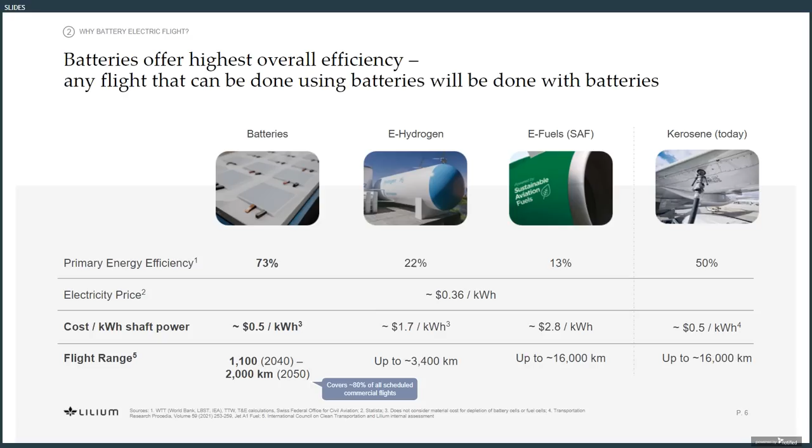Therefore, we believe that any flight that can be done with a battery-powered aircraft will be done with a battery-powered aircraft. Electric aircraft are limited in range today, but batteries are getting better every year. Hence, we believe, from a technology point of view, that by 2050, around 50% of all flown passenger kilometers could be done in a battery electric aircraft.

Over the next 1 or 2 decades, we expect 75% of electric aircraft performance improvements to come from the battery. So the battery is the performance driver in an electric aircraft. The two key aspects here are power for takeoff and landing and energy for the range. Beyond that, every cell design is a compromise across many competing aspects such as safety, cost, cycle life, recyclability, and many other factors.

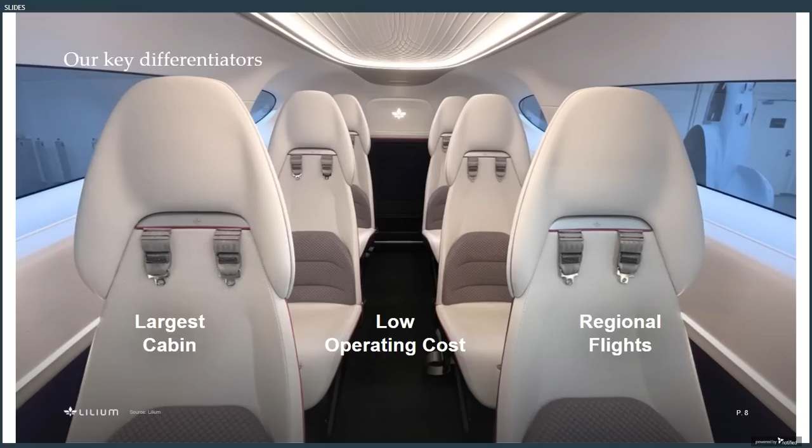As a short recap, the key differentiators of our Lilium Jet are the largest cabin in the sector with clear premium positioning and aesthetics. With $2 per passenger kilometer, we have low operating cost that even includes margin for an operator, and we focus on regional missions.

And beyond that, on the technical side, of course, we are highly differentiated, developing the first eVTOL aircraft using electric jet engines. 95% of all aircraft on the globe use jet engines. And I'm quite sure if you have flown turboprops, you know from your own experience why passengers prefer jet aircraft. They fly faster, they have lower noise emissions and vibrations in the cabin, they are and feel safer, they clearly have better aesthetics, and on top they are simpler as they don't require variable pitch on the blades.

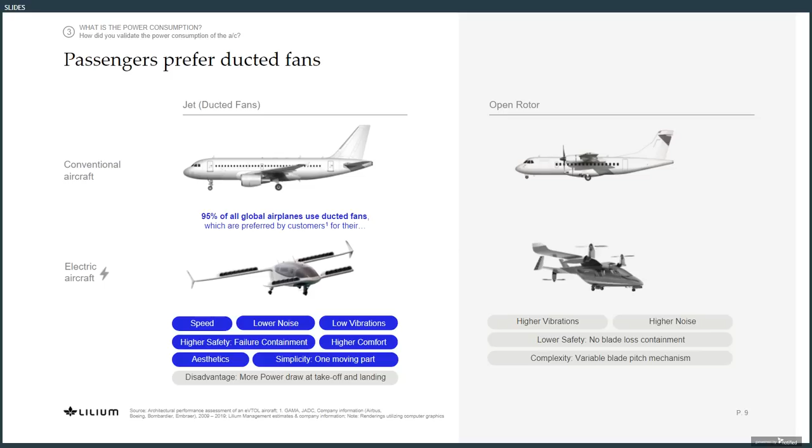However, jet engines are also well known to require more power at takeoff and landing. So let's look into quantifying this disadvantage and evaluate whether the benefits still outweigh the disadvantage.

To get going, we need to understand the concept of disk loading. Disk loading is the weight of the aircraft divided by the total cross-section of all propellers or engines. And what you see on the left is a graph drawn up by NASA around 20 years ago, showing the hover efficiency of various aircraft types depending on their disk loading. This is applied physics, so this graph does not change just like gravity or the Earth's surface or pi does not change. In general, the rule applies that the lower the disk loading, the lower the aircraft power consumption in hoverflight. But also, the higher the disk loading, the faster the aircraft flies.

You can see that a helicopter has the lowest disk loading among traditional aircraft with around 25 kilograms per square meter. On the other side, on the right, a direct lift aircraft such as the F-35 is operating at roughly 1,000 times higher disk loading since it is a high-speed aircraft.

Now we will use this chart to get an idea of the power consumption in hoverflight in a very simple way. Our aircraft is using jet engines and it has a disk loading of around 1,150 kilograms per square meter. We go into the chart and obtain a lift efficiency of around 1.7 kilograms per kilowatt of shaft power. Now we invert this value to obtain shaft-specific power. We divide by the electric powertrain efficiency to obtain specific electric power, and we multiply with our aircraft weight to finally obtain the total electric power draw of 2,147 kilowatts.

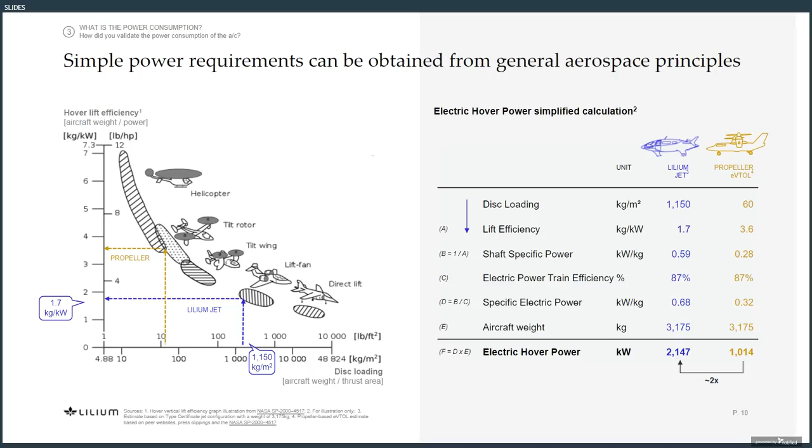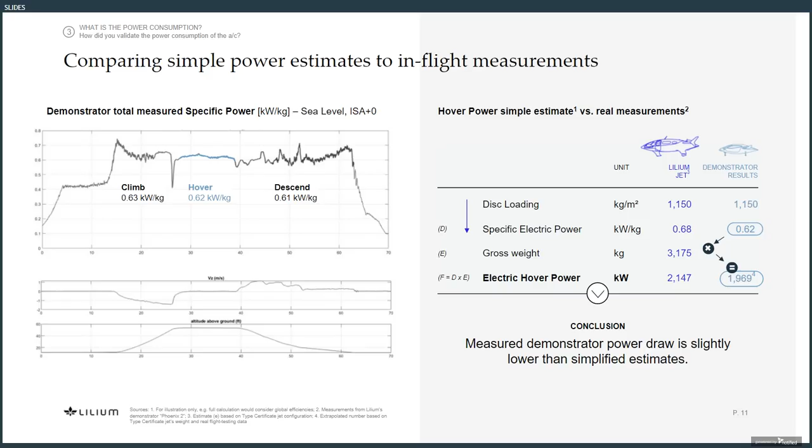But overall, the simple approach of the NASA paper predicts power very well. I will use the high power consumption value from the NASA paper throughout the rest of this presentation to be conservative and also account, for example, for flight at higher altitudes. Also, it is important to note that all our mission profiles and range estimates are based on the fully loaded aircraft, so with the full weight we are flying those missions.

What I have just done is an ultra-simple approach to demonstrate power consumption, which you can easily follow in a presentation. Of course, our engineers are using far more sophisticated tools to calculate the power consumption of our aircraft. We are following the principle of evidence-based engineering at Lilium. This is the same approach which allows the major aircraft OEMs to predict fuel consumption of their aircraft with an error of less than 1% before they actually fly.

What we need for certification of the aircraft is a validated aircraft performance model which accurately predicts flight physics of our aircraft in all flight conditions. This includes, for example, failure cases, the full speed envelope, altitudes, temperatures, and maneuvers.

To get it, it all starts with simulations. Based on those simulations, we design a first loop of our aircraft and systems. Then we did 4 years of flight testing and a total of more than 5 months of wind tunnel testing to obtain real-life data with which we can calibrate and validate our simulation tools.

Additionally, we measure compressor maps, motor efficiency charts, and we do battery characterization. Then we take all this data and integrate it into an aircraft performance model, which is validated by real-life data and which can be used also for certification.

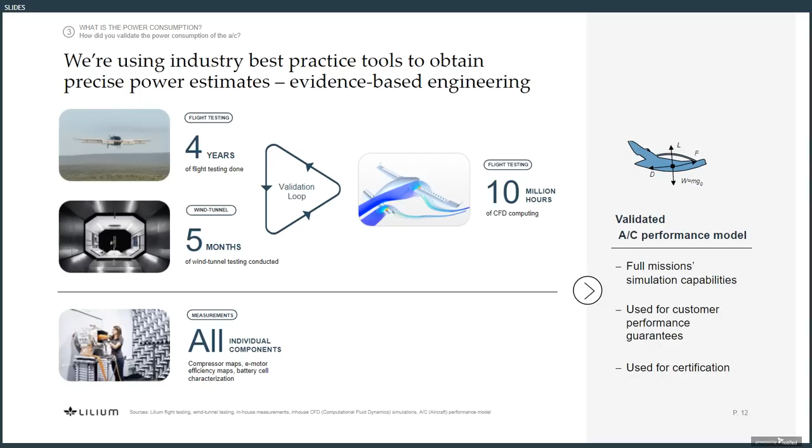All our power profiles and mission profiles, also those in this presentation, are based on this validated aircraft performance model. And you can imagine, as we use this model for both certification purposes but also to make performance guarantees in the binding contracts with our customers, the rigor that goes into it is incredibly high.

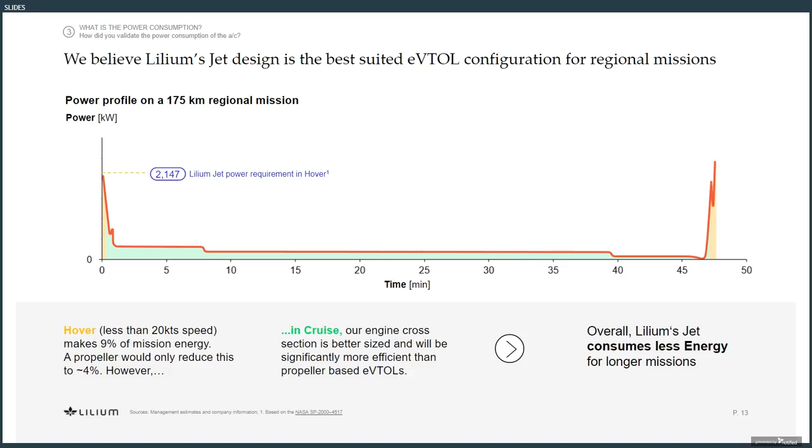Overall, Lilium's jet consumes less energy for long missions. The increased power consumption in hover is more than compensated in cruise flight. On top, we are flying significantly faster in our long-range mission compared to our peers. Hence, our aircraft is ideally suited for regional missions, and the better batteries get, the bigger our advantage becomes.

Now we shift our focus to how the battery cells provide this power and energy. The power consumption in hover flight divided by the total mass of battery cells in the aircraft gives us the specific electric power we draw from the cells in hover flight.

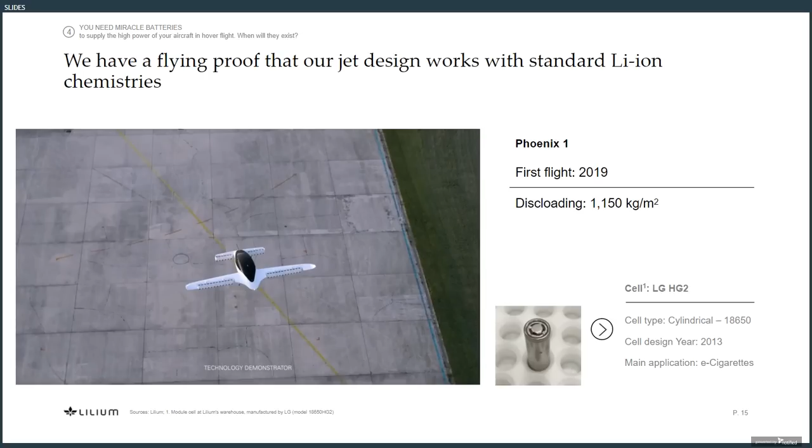In contrast to what I've just shown, we have heard concerns that our aircraft would be dependent on battery technologies half a decade away. This is obviously wrong. In fact, we have done 4 years of flight testing with full-scale demonstrators, and all of our demonstrators have been flying with off-the-shelf batteries using standard lithium-ion chemistries.

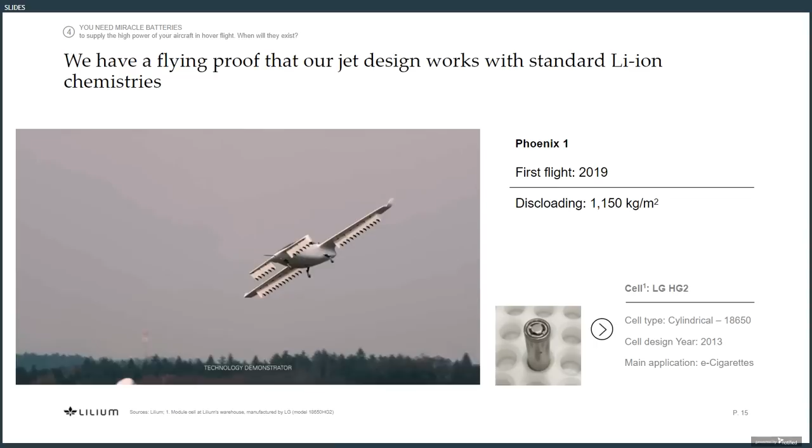In 2019, we flew our Phoenix 1 demonstrator for the first time, and the cells in the pack were the LG HG2 cells, which were designed already in 2013. It's a well-known 18650 cell, which you can actually buy on Amazon.

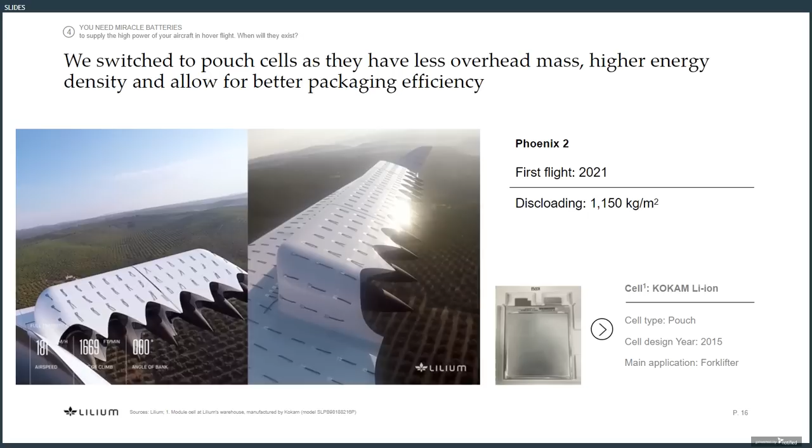In 2021, we then flew the second generation of our demonstrator. Again, we used a standard lithium-ion chemistry with a graphite anode. This time we were using a Kokam cell, which was originally designed around 2015 for forklift applications. The battery pack in this aircraft was also the first flying prototype we had which fulfills the full fire containment requirements from FAA. So we have 4 years of flying proof that standard lithium-ion chemistries can provide the power we need for flying this aircraft configuration.

The reason we're using lithium-ion cells with higher silicon content for our entry into service aircraft is our regional business model. We simply want more range.

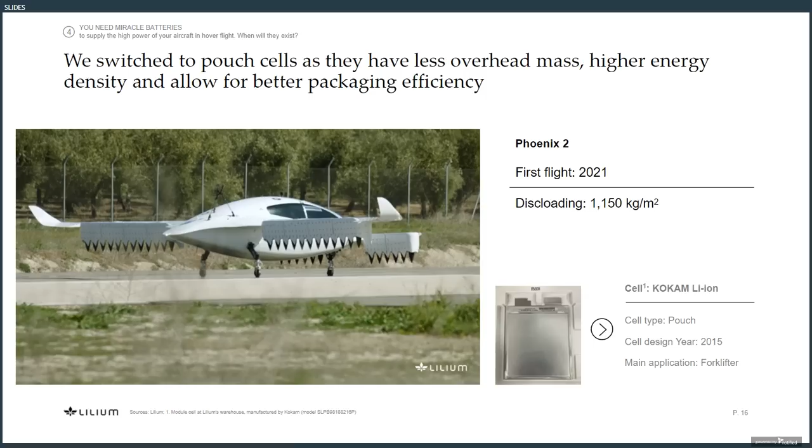This is the cell which will actually go into our conforming aircraft, which we are building right now. It is a lithium-ion cell designed by our technology partner Ionblox in the USA. We are invested in Ionblox alongside our co-investors Temasek and Applied Materials. Ionblox have developed one of the best silicon anodes for lithium-ion batteries, which can be mass manufactured.

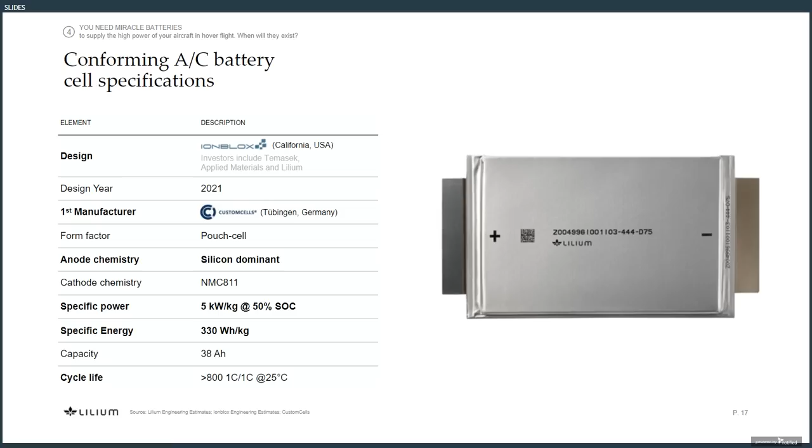The anode is silicon dominant, which means roughly half is silicon and the other half is other components. The silicon in the anode is the reason why this cell achieves higher energy, higher power, and higher fast charging capabilities than cells with standard graphite anodes. The cathode is a standard NMC 811 cathode, the number 1 cathode chemistry you can find in automotive cells these days. The cell is being produced by Custom Cells here in Germany.

Now let's put this cell into context of what you can find in the market. Energy and power are always a compromise in a cell. You can either find high power cells, such as the Swaytronic, which provide 3 times the power of our cell, or you can find high energy cells, for example the ones from Amprius or CATL, which have announced more than 50% more energy than what we have in our cell right now.

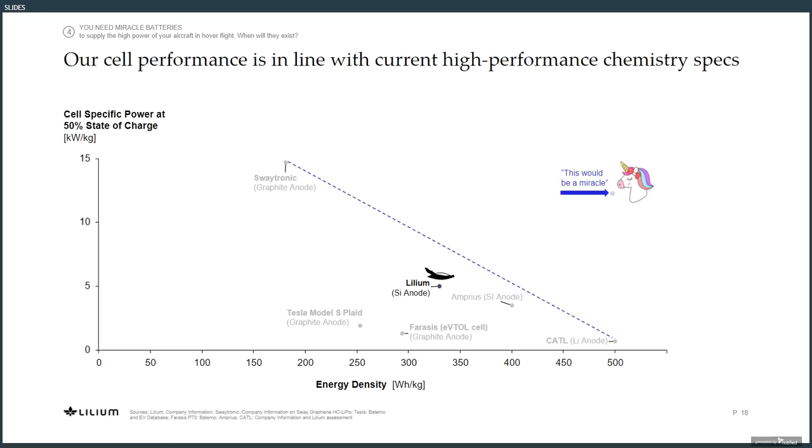We are not alone in using silicon anode cells. In fact, it is widely recognized that silicon anodes are the next step in lithium-ion batteries in automotive. There's a great article from IEEE Spectrum explaining why silicon is the next big thing in lithium-ion batteries. It enhances energy and power, and also allows fast charging without cycle life degradation.

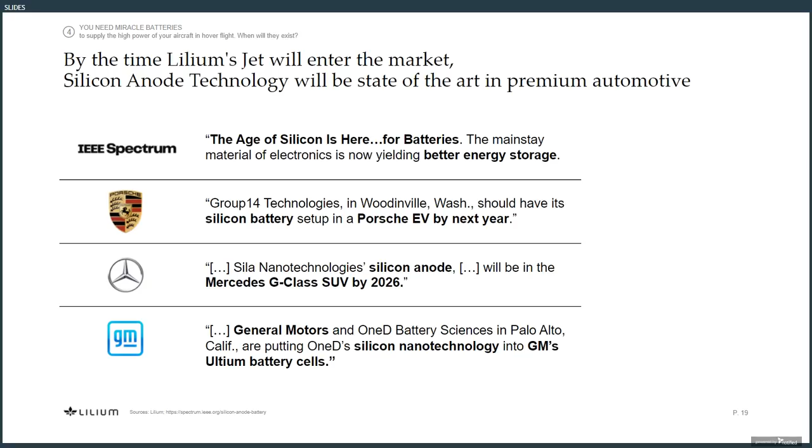For those reasons, GM, Porsche, and Mercedes have all announced premium cars for the 2024 to 2026 timeframe using silicon anodes like we do. Tesla, of course, has also announced bringing silicon into their cells. So by the time our aircraft goes on the market in 2026, our cell chemistry will be state-of-the-art in premium automotive. But this also means that if you come to market in 2026 with an electric airplane using graphite anodes, you are using a dated technology that is no longer competitive.

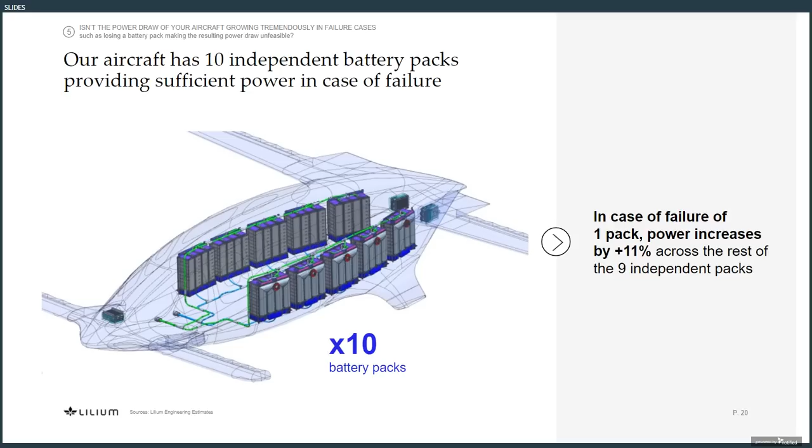Another question we sometimes get is whether the power draw grows tremendously in failure cases. Of course, our engineers have thought extensively about this, and we wouldn't obtain certification if we had no answer. To mitigate this problem, our aircraft has 10 independent battery packs. If one of them fails, the remaining packs need to provide only 11% more power. This is in line with what the cells can produce in an emergency. We always take worst-case failures into account in our design, and we have tested the power increase resulting from all kinds of aircraft failures on our cells.

Another question we've received often is whether our battery pack will become too heavy once certification and safety requirements are incorporated. Well, we have already incorporated all safety requirements into our current battery pack, such as crash protection, fire containment, flight loads, and redundancy. We had to, since this battery pack goes into our conforming aircraft.

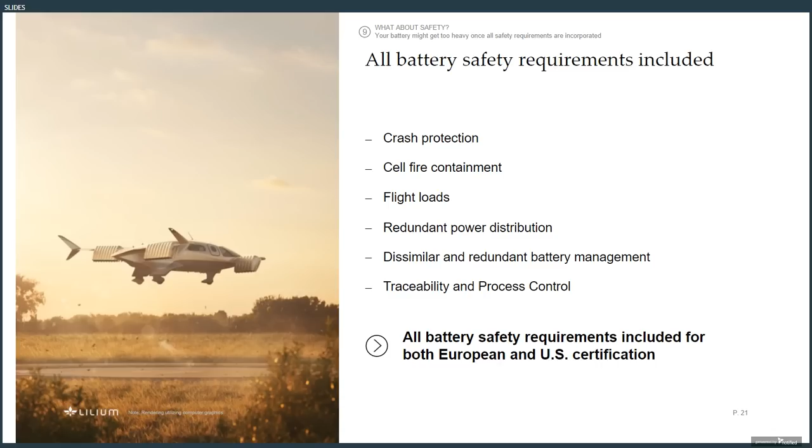The first pack in which we had incorporated full fire containment was the Phoenix 2 battery, which flew in 2021. Since then, we have done several years of flight testing with this technology, and those tests have confirmed that our design is compliant with the regulation.

Another question we hear often is what reserve concept we are using, and what operating range results from it. On the European side, EASA have formally released an operating reserve concept called Part IAM, which is applicable to our aircraft. Part IAM is a performance-based framework. There is no specification whatsoever for hover time. All our operating range estimates and our aircraft design are based on the EASA Part IAM reserve concept.

This reserve concept is stricter than any other operating framework for helicopters, for example, since it mandates landing on a vertiport in all cases, even the most critical failures.

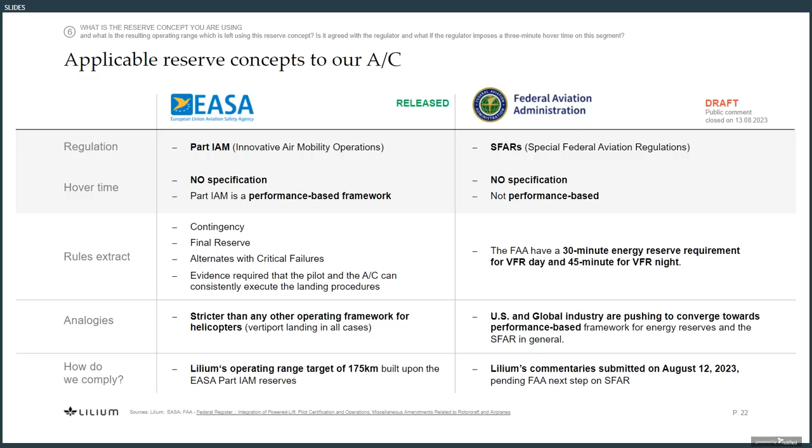On the FAA side, there have been some wild rumors that the FAA may require a 2 to 3 minute hover requirement. This is completely and unequivocally false. The FAA put out an SFAR in June 2023 and opened it up to comments from the public. There is not even a single mention of hover requirements in the whole document. The link to it is on the page here, so you can see for yourself, and the only mention is a 30 to 45 minute energy reserve.

It is clear that eVTOL operations become problematic with a 45 minute reserve. Hence, all of our peers and an overwhelming majority of the aerospace industry have requested performance-based reserve requirements from the FAA, just like EASA is already using. If you go to the link on the page here, you can see and read the comments from all the various companies for yourself.

It is a big advantage for us that our regulator has provided substantially more guidance than the FAA so far. We have a clear and released framework for eVTOL operations in Europe. And here is how the European reserve concept works.

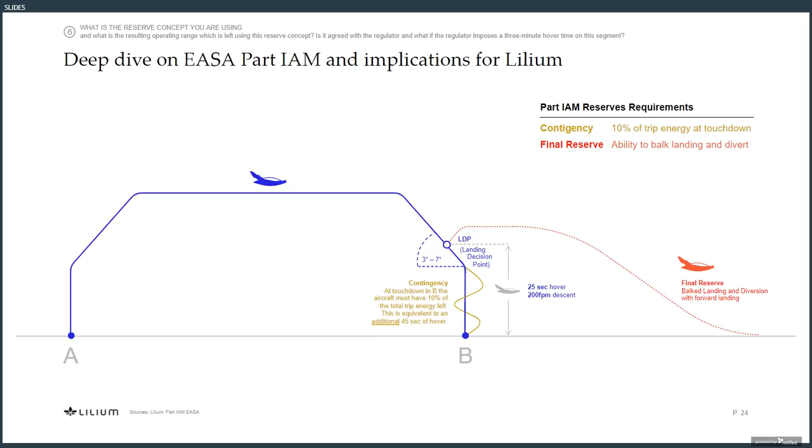To validate the reference landing procedure, we are again using a best practice aerospace approach. We have a mixed reality 3D simulator with a fully representative cockpit and a full motion platform. This simulator contains the validated control laws and flight physics from our certification aircraft models. We can simulate wind, rain, and night conditions in various combinations.

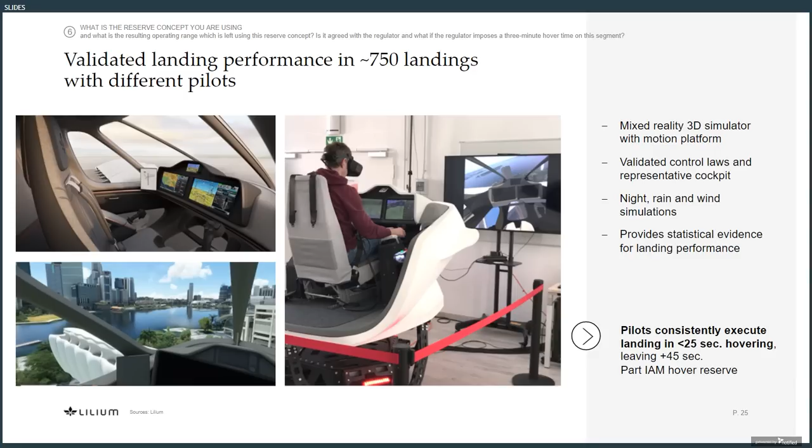In this simulator, we have developed our reference landing procedure and tested it with more than 750 landings with multiple pilots. We have also developed landing aids which make it easier for pilots to consistently land the aircraft with our procedure. The result is that pilots can consistently execute the reference landing procedure as requested by the regulator. This is a great testament to how well our pilots and engineers have optimized the handling qualities of the aircraft, the landing aids, and the total procedure.

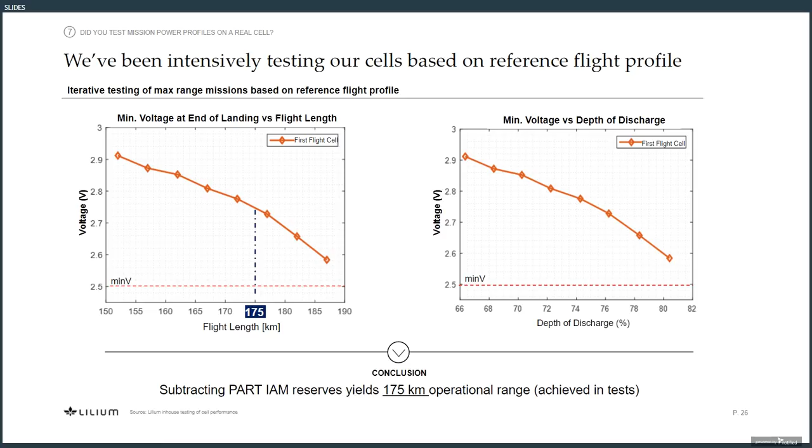In those tests, our cells achieve more than 190 kilometers range with full aircraft weight, including 25 seconds hover at the end of the flight. Then we subtract the 10% Part IAM reserves to obtain our operating range of 175 kilometers. What you can conclude from this slide is that the cells achieve the operating range plus reserves in tests with real flight profiles.

Some people have repeatedly questioned the cycle life of our cells, since new high-performance chemistries often have great performance but reduced cycle life. In our case, we specifically picked this technology because it yields exceptionally good cycle life.

Here you can see a cycle life test with our cells from one year ago, which we conducted at Idaho National Laboratory. The procedure was 100% full charge and discharge over one hour each. This is a very common test in the battery industry because it allows comparison between different types of cells. The result was that our cells retained 88% of their original capacity after 809 full cycles.

This is an exceptionally good result, and it surpasses many standard chemistry cells we've worked with so far. There are chemistries out there which yield even higher performance than this one, but we have so far not tested one which achieved a similarly good cycle life at the same time.

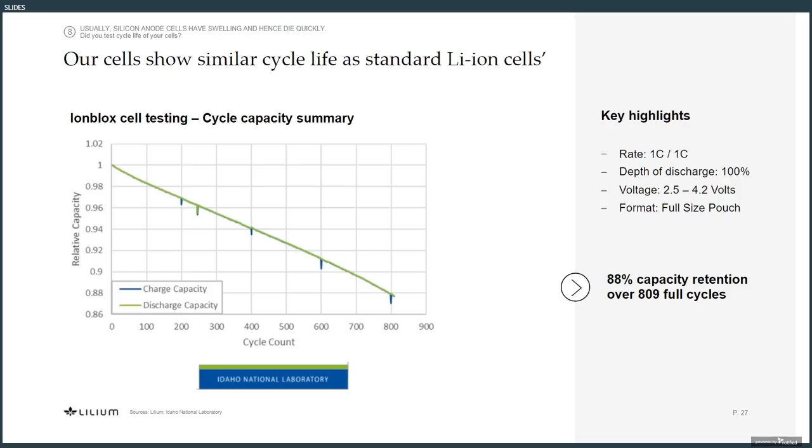A concern our engineers had was whether repeated fast charging in operations, or the high power pulses during takeoff and landing, could significantly reduce the cycle life of the cells. So we came up with a heavy-duty test using a flight profile in which we continuously fast charge the cells and fly the aircraft with maximum takeoff mass in mid-range missions, and additionally we did not actively cool the cells. The result was that they achieved 1,450 mid-range flights with fast charging, and still had 88% of their capacity retained.

An amazing outcome. For comparison, our business case currently assumes only 800 flight cycles, so there's plenty of margin on the cycle life. But why did the cells achieve even more cycle life in flight cycles than in the standard test? Our interpretation of the results is as follows.

The fast charging doesn't really harm silicon anode cells. Their big advantage is that they can handle much faster charging without damage. The high power draws in takeoff and landing were already carefully mitigated by Ionblox in the cell design. The cells have opposite-sided tabs and are electrically symmetric on the positive and negative side. This completely avoids hotspots in high power operations.

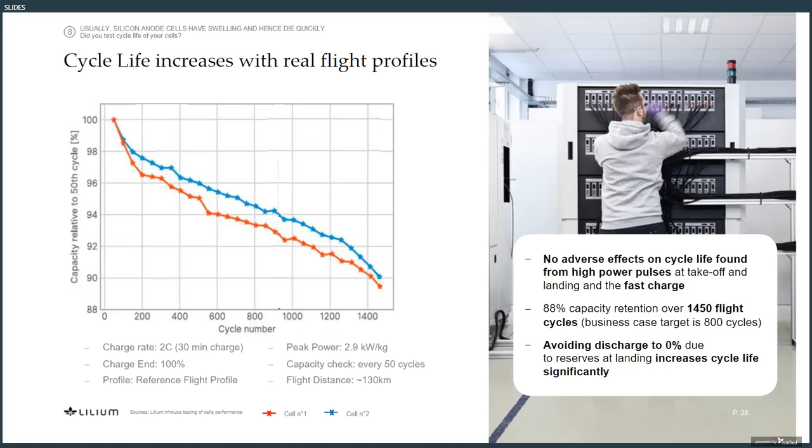Now, what really increases the cycle life is the fact that in the flight missions, we are landing with around 30% energy left in the cell. This means we are avoiding discharge down to 0, and this is really what increases the number of flight cycles in this test.

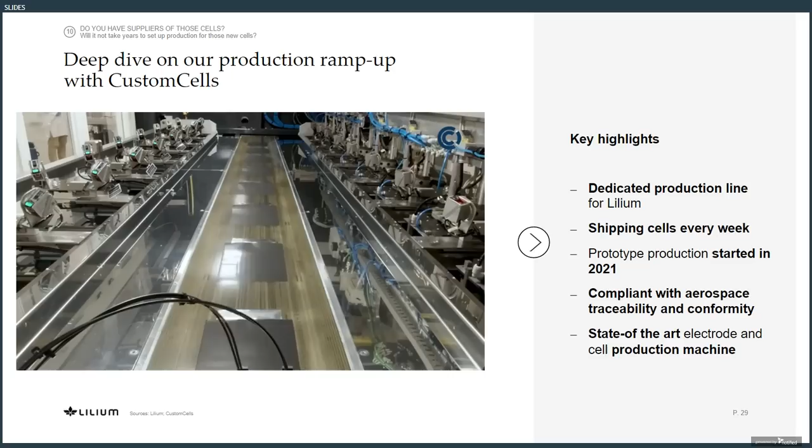We have now extensively discussed performance and cycle life of the cells. Let's now shift to industrialization and supply chain.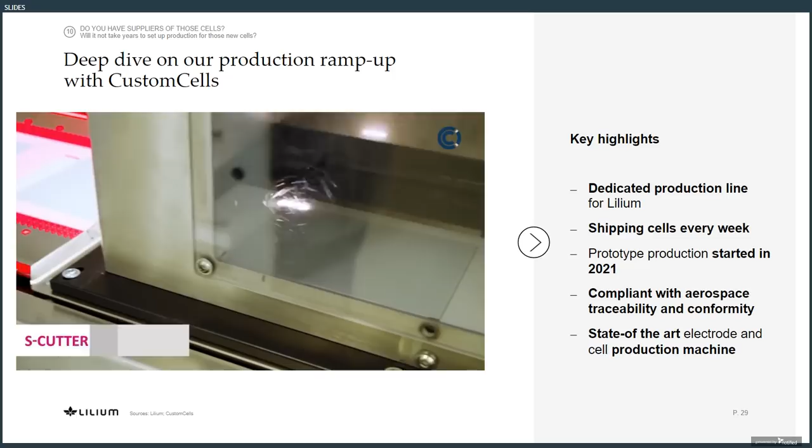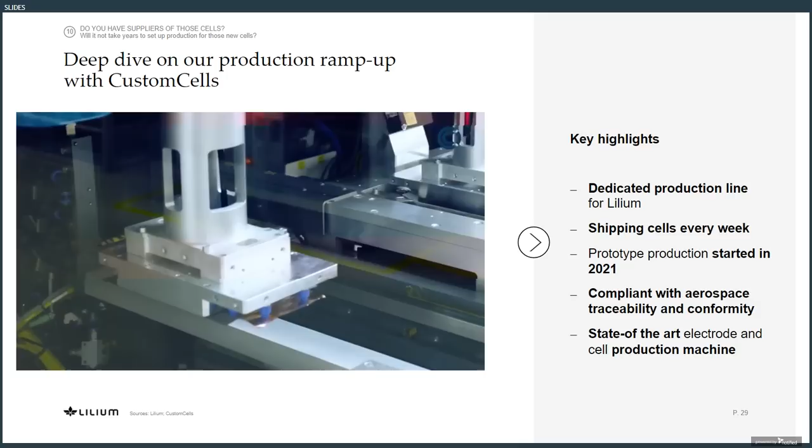Our cells are being produced at CustomCells in Germany. CustomCells started production of cells for us in 2021, and meanwhile they have a dedicated production line for Lilium equipped with state-of-the-art equipment for automated cell manufacturing. They are shipping cells on a weekly basis to us, ensuring compliance with aerospace traceability and conformity standards. At the moment, both CustomCells and us are laser focused on ramping up production rate and continuously increasing quality and yield of the line.

But why are we able to produce these new cells with automated equipment already? Well, the answer is very simple: 30 out of 31 production steps are the same as for any other lithium-ion battery, and this allows us to use standard cell production equipment. This is a big advantage of the chemistry we've chosen. One of the biggest problems with novel chemistries is often not the performance, but that they require new production processes or new supply chains for raw materials. We have very carefully selected our technology to avoid those risks.

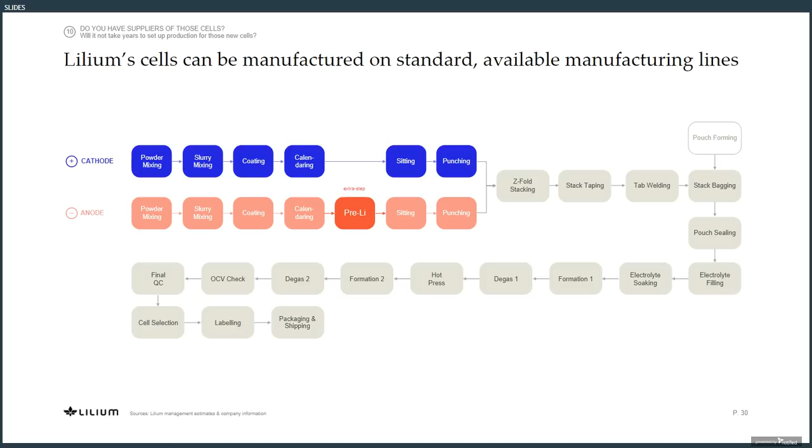And even for the one novel step, the pre-lithiation, we are using a simple calendaring process for which automated machines are available and which is expected to be very scalable.

Pre-lithiation means you are adding additional lithium to the cell during production. So how does that work? We are buying a plastic foil from Applied Materials, which is coated with lithium. This lithium foil gets pressed on the anode of the cell in the calendaring machine, and the lithium then transfers from the plastic foil into the anode.

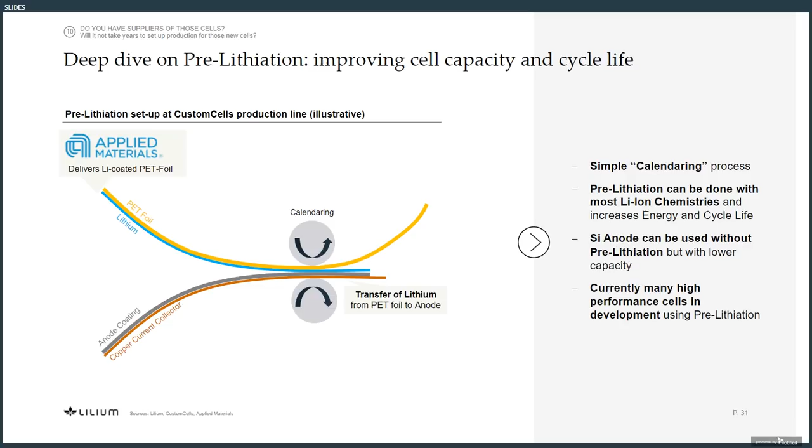Applied Materials have been a great partner on this for several years, and they are also an investor in Lilium alongside us. The pre-lithiation of the cell increases capacity, and it also improves the cycle life of the cell. It's a process which is currently being implemented for many high-performance cells in the automotive sector.

Our primary cell production partner, CustomCells, has consistently increased output and quality over the past year. But since batteries are a critical component, we are de-risking our battery production with a multi-sourcing approach. As mentioned earlier by Rama, we have extended our existing partnership with Innobat to prepare large-scale production of our battery cells. Hereby, Innobat is being supported by its investor and partner Gotion.

Gotion is one of the world's largest battery manufacturers, and VW is the largest shareholder in Gotion. Production of Lilium cells at Innobat's existing facilities in Slovakia is due to start in early 2024. Innobat will also build Lilium cells at its future Gigafactory, which they are jointly setting up with Gotion in Slovakia. This factory will have up to 4 gigawatt-hours of production capacity, and it enables scaling of our business significantly.

As shown in this presentation, our market entry cells are working and we have the supply we need. But this is just a starting point for us. We want to continuously extend our lead on battery technology. Our aircraft is designed such that we can upgrade the battery packs without changing the aircraft. Similar to VW, we have defined our own unified cell format, with which we are working on a roadmap of cell performance upgrades while still using existing manufacturing lines and partners.

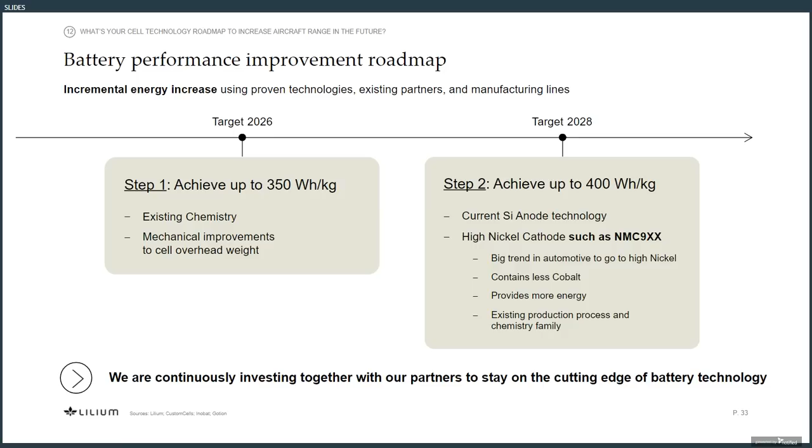Both the mechanical improvements and the high nickel cathode are becoming state-of-the-art in automotive during the next 3 years. So our advantage is that we already have a mature silicon anode and we can continuously improve performance in the next years with low-risk technology bricks.

Where are we heading to in the future? We are globally by far the most advanced company in design and certification of an electric jet aircraft, certified against the same safety standards as a commercial airliner. So we are best placed to lead electrification of regional aviation by applying our technologies and know-how also to larger aircraft platforms. These will be both eVTOL jets and conventionally taking off and landing electric passenger jets.

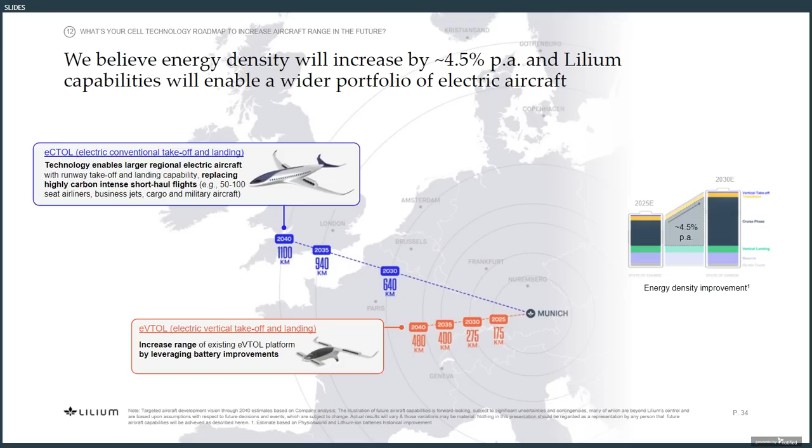What you see on this slide is how the operating range of eVTOLs and conventional electric passenger jets improves over time, assuming a 4.5% energy increase per year for the battery cells. This is attractive in two ways for us. It squarely increases our market size and sustainability impact, but battery upgrades to the existing fleet are also a strong revenue stream for us.

So just to summarize the main points for today: you now know the power requirements of the Lilium Jet, how they have been measured and validated. We've seen measurements of our cells showing that they handle these requirements very well. We've explained regulators' reserve concepts and shared measurements of our cells confirming 175 kilometers operating range with those reserves taken into account. We have shown how our landing performance has been validated and that our cells have plenty of margin on cycle life. We've shown that we have de-risked production and supply of these cells in existing lines and a multi-sourcing strategy with strong partners. The battery cell technology we selected strikes a great balance between performance, low-cost production, available materials, and high cycle life.

Our aircraft and cell technology are driven by our focus on the regional business model, where time savings are much larger than in urban air taxi applications, and the TAM is larger than for urban air taxis as well. In this big market, we are clearly leading the group with our cell technology, our jet aircraft architecture, the 6-passenger cabin, and the industry-leading low operating cost.

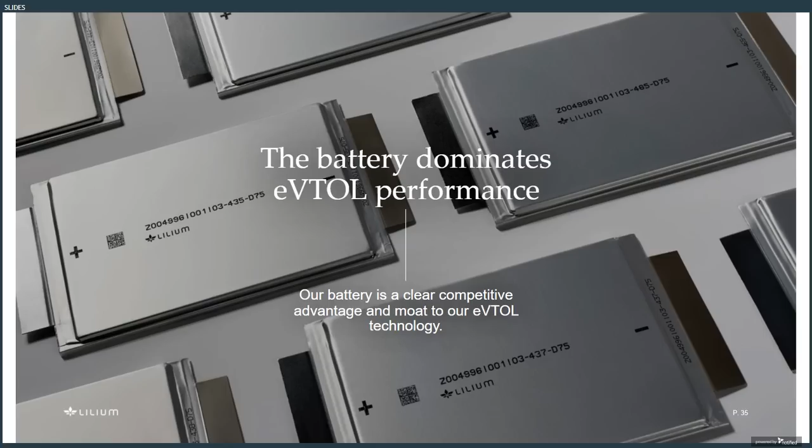Thank you, Daniel. Ladies and gentlemen, I hope we were able to answer your questions in regards to our battery, our energy and power needs, how we drive this, improve it, and the progress we've made in our battery industrialization as production on our first aircraft is beginning imminently.